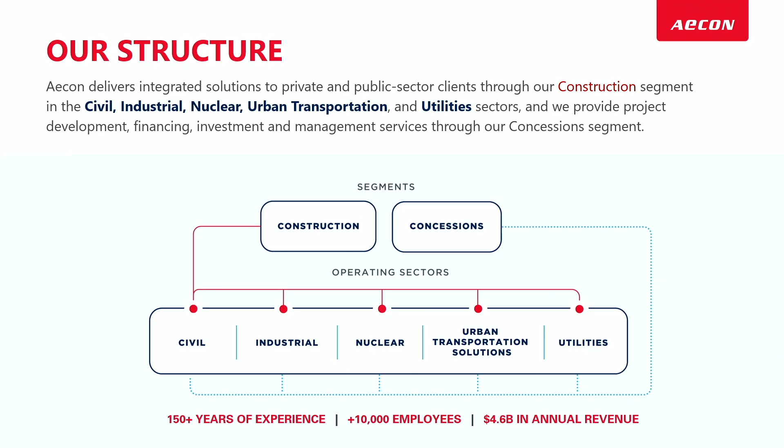Aecon Utility Engineering falls under the Aecon Utilities umbrella.

And to speak a bit about what my division does, we're the dry utility experts at Aecon. 20 years experience in engineering, $27 million worth of revenue for this year, over 200 employees.

And we have $15 million in backlog. Our well-established industry relationships help us coordinate the interests of pipeline, transit, telecommunications, electrical, green energy.

Once again, we are a team of dry utility experts.

When we talk a bit about why our customers choose Aecon Utility Engineering, there are 3 pillars that set us apart: quality, constructability, and we provide cost-effective solutions.

So quality meaning our safety is at the heart of every operation and every design that we do. And our processes ensure that any design or operational changes never compromise our integrity.

For constructability, the biggest advantage we have is that our engineering and construction teams work hand in hand together. We're integrated teams. We work out of each other's offices and yards.

And our processes basically help us deliver jobs that have less field surprises, smoother execution, and faster deliveries.

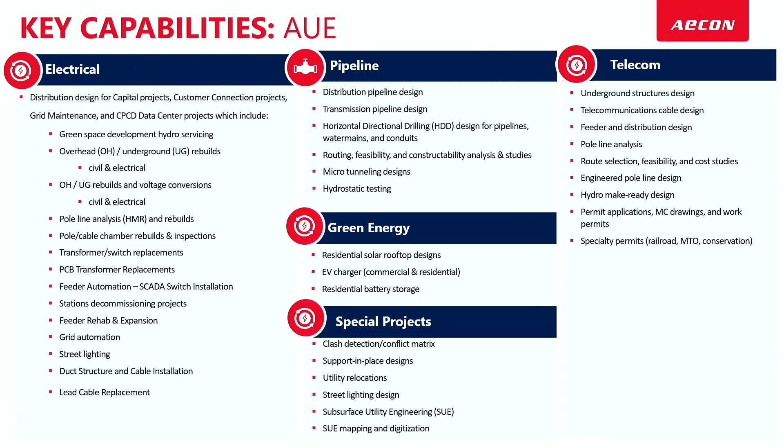So we have electrical, our electrical design for capital projects, customer projects, grid maintenance, CPCD data center projects, which include green space development, as well as overhead and underground rebuilds for civil and electrical services.

We do voltage conversions, pole line analysis, hydro make-readies, chamber rebuilds and inspections, transformer replacements, and so on.

For our pipeline group, we engineer distribution pipeline designs, transmission pipeline designs, horizontal directional drilling for pipelines, conduits, and water mains. We do many studies like routing studies, feasibility studies, constructability analysis studies, and microtunneling designs.

For our green energy renewable group, we do solar panel rooftop solar panels for residential homes, as well as battery storage for residential homes. We do EV charging stations for commercial and residential.

Special projects is mainly our subway extension jobs or LRT jobs, where we do clash detection and conflict matrices, basically looking at what the owner's engineer has produced for plans, finding out the best way to move existing utilities, whether it's gas, hydro, or telecommunications, out of the way so that we can build the subway station. We do support-in-place designs for them, and once construction is complete for the subway or LRT, we do reinstatement designs, which means putting everything back in place.

For telecom, we do underground structures designs, telecommunications cables designs, feeder and distribution design, pole line analysis, and route selection and feasibility studies.

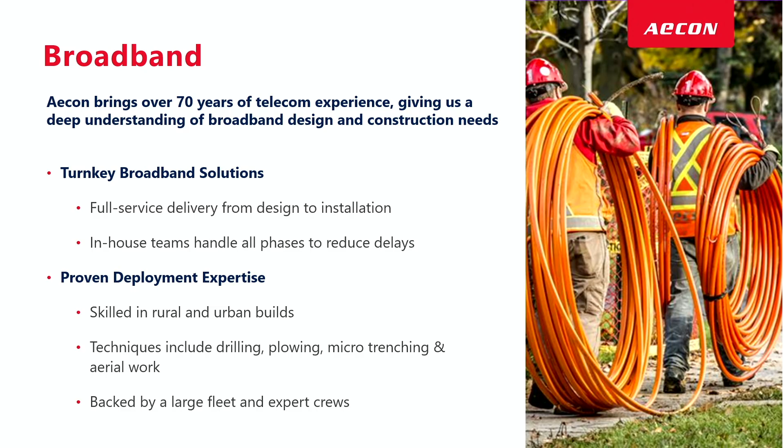We have full service delivery from design to installation. We have an in-house team that handles every single phase of the project to reduce delays. We have proven expertise in deployment. We're skilled in rural and urban builds. Our techniques include drilling, plowing, microtrenching, and aerial work. And we're backed by a large fleet of expert crews.

We have Idaho County, where we're in phase 1. We won phase 1 on 3 RFPs connecting the cities of Orofino, Nez Perce, and Grangeville, Idaho, and we begin construction on that, which is 30 miles of conduit fiber with 2 telecom shelters and generator stations on September 22nd.

Next, we have Metronet fiber. This job is in Albuquerque, New Mexico, where we started this project in 2025, and it's expected to go until 2027. $60 million scope, where we're doing construction for the last mile urban. Work packages range from 20,000 feet to 40,000 feet, including placement of small and large vaults, residential and commercial installation of HDPE conduits along pre-designed routes. It's a directional drill job.

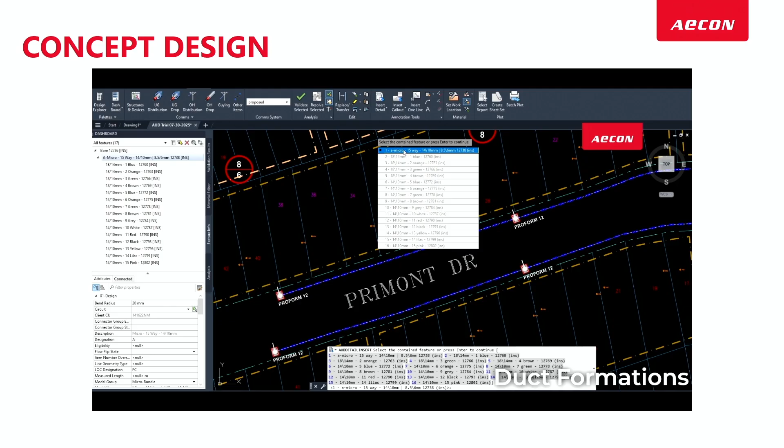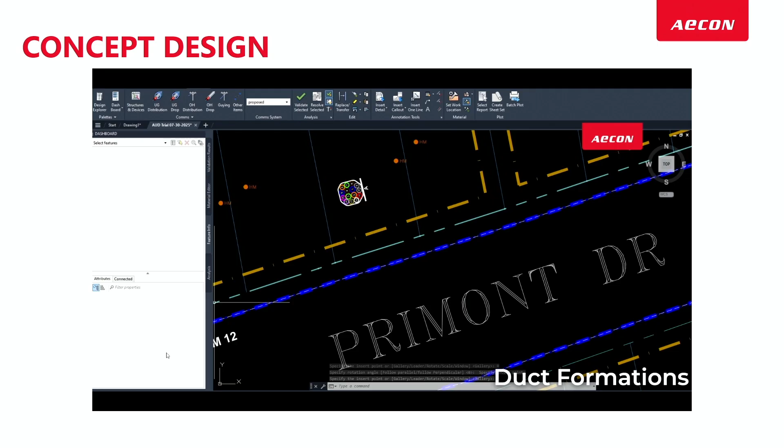AUD supports complex duct formations, including multi-cell microducts. Designers can configure duct banks with predefined templates, ensuring consistent layering and spacing. The software checks for constructability and alignment, making duct design faster, more accurate, and scalable across projects.

Cable routing in AUD is intelligent and rules-driven. Designers can place fiber or coaxial cables with automated slack loops, terminal assignments, and splice counts. The system tracks cable paths across ducts and conduits, ensuring logical connectivity and reducing manual errors.

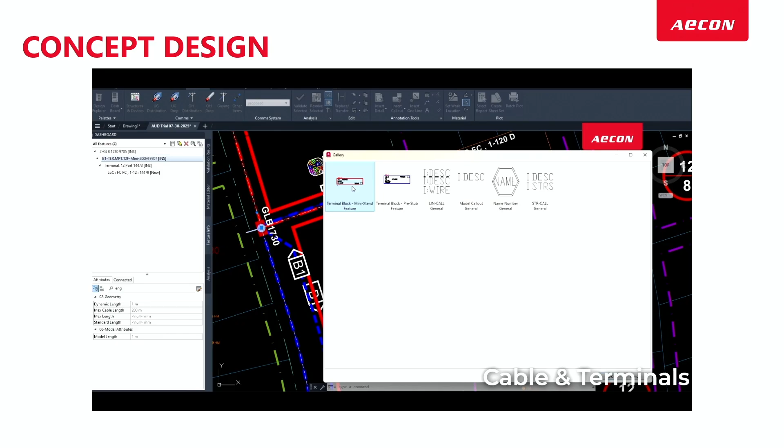Terminals are placed using telecom-specific templates that align with OSP standards. AUD ensures each terminal is correctly connected, labeled, and validated for capacity. Real-time checks confirm splice limits and terminal distances, improving field readiness and documentation accuracy.

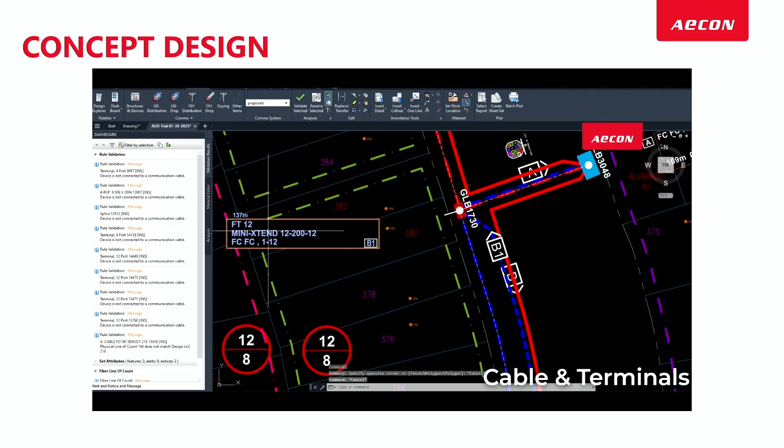AUD's live quality control engine runs continuously during design. It flags clearance violations, duplicate assignments, and missing connections instantly. This proactive validation reduces post-design QA/QC, accelerates timelines, and boosts confidence in every deliverable.

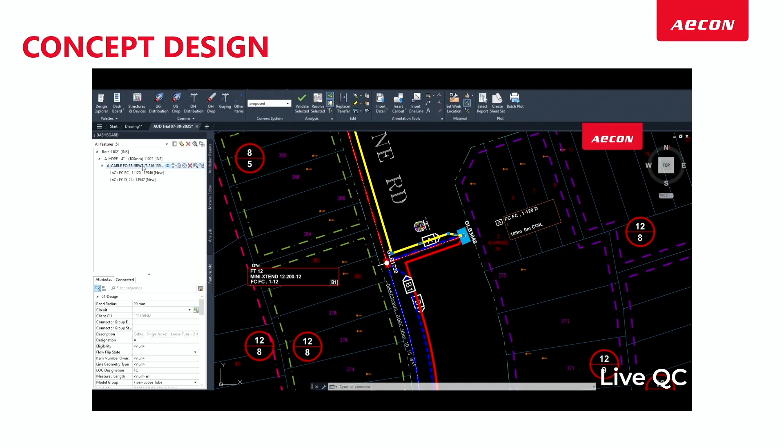I have one more demo video.

ABD allows designers to place telecom equipment with precision using intelligent objects. Each item, whether a cabinet, pedestal, or splice enclosure, is inserted with embedded metadata and rules. This ensures accurate placement, automatic labeling, and seamless integration into the overall design.

With ABD, conduit placement is streamlined. Designers can lay out conduit paths that the system validates for each route in real time, reducing rework and ensuring compliance with ISP standards. In addition, this allows for accurate duct formations for connectivity purposes.

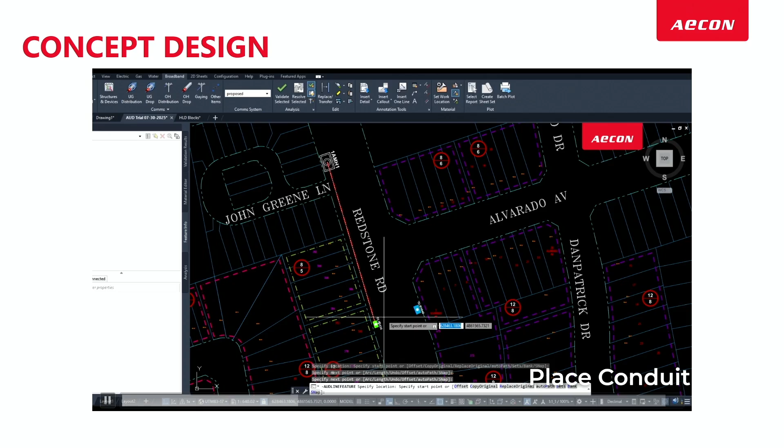AUD supports complex duct formations, including... sorry, that was the same one. I'm going to play the next one.

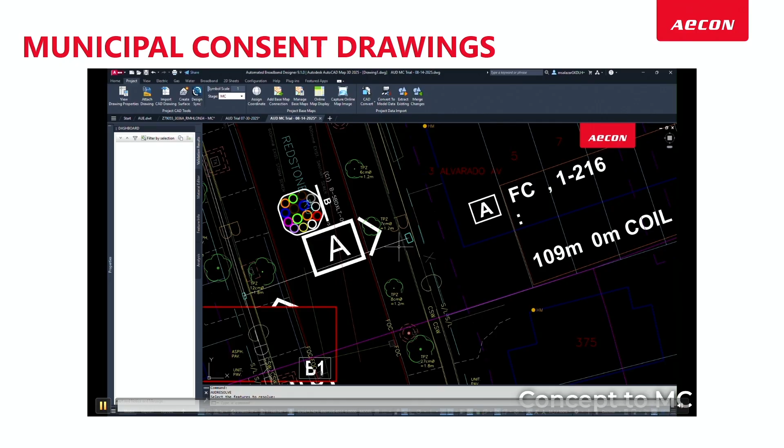ABD enables seamless transitions between design stages. With a single click, concept designs evolve into municipal consent mode, activating detailed validations like clearance zones. This reduces manual rework and ensures every stage builds on a validated foundation.

Line connectivity is visualized in real time within ABD. Designers can trace fiber paths across terminals, splice points, and conduit segments. This ensures logical routing, accurate documentation, and immediate detection of breaks or misalignments in the network.

ABD allows designers to switch construction types like aerial, underground, microduct, directional drill, or open trench on the fly. Each change updates associated rules, clearances, and materials automatically. This flexibility also supports diverse deployment scenarios.

Beyond basic adjustments, ABD empowers designers to manipulate running lines with precision. You can introduce curves, elevation changes, or offsets to reflect real-world conditions. As you reshape the path, ABD's live validation engine checks for clearance violations, depth requirements, and connectivity integrity.

ABD supports embedded construction notes and Arbs directly within the design. Field instructions, permit references, and build annotations are linked to specific assets, improving clarity for crews and streamlining as-built documentation.

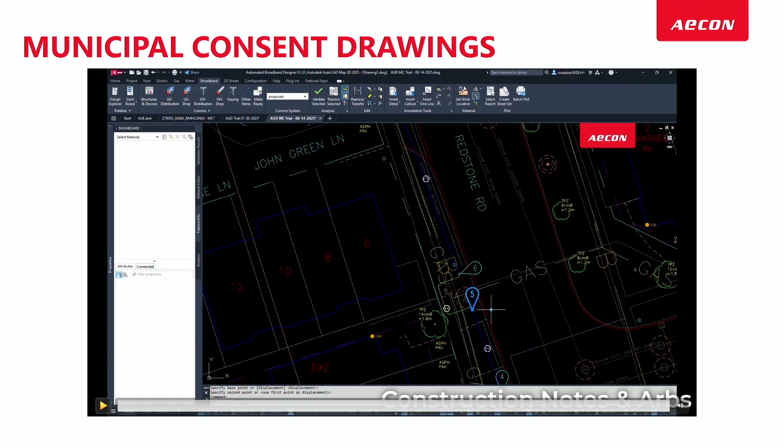Okay, that was the final demo video. ABD. Okay, thank you. We're not replaying that again.

So just the last couple of slides. I just want to talk a bit about the next steps and what our Aecon advantage is.

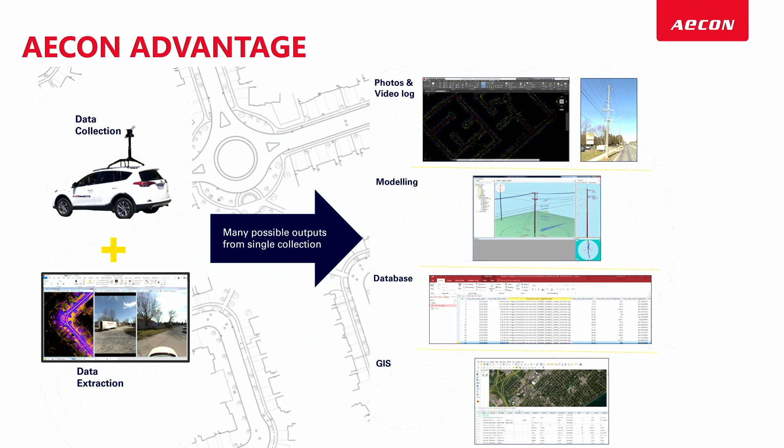Right now we do our own data collection and extraction, and we can put it in different platforms, whether we want photos or video log, or model it in our O-Calc software, SPIDAcalc, or PLS-CADD. We can also convert it to a database or a GIS system, which is the front-end solution all packaged together.

Future state, what we're thinking is all of this can be imported in, converted in with a click of a button. So that means you have your existing infrastructure, and then you'll have your existing new designs that you can build towards. And it'll be a rule-based design, so we'll utilize automated rules to design around the existing infrastructure that we just imported in.

Again, we can export plans and permits. This can help us with exporting plans and permits for construction crews.

Also, another future state we're thinking about is how do we incorporate this into as-builts? Can we put this all into one platform? Can we provide our construction crews with a tablet with an intelligent AutoCAD ABD model installed in it, where they can just draw intelligent lines?

That way, when it's synced, all of it gets uploaded and put into our original as an as-built, and there's no human intervention, as in no one needs to go in and validate or check. It's all checked through rule-based checks, and your as-builts are already complete.

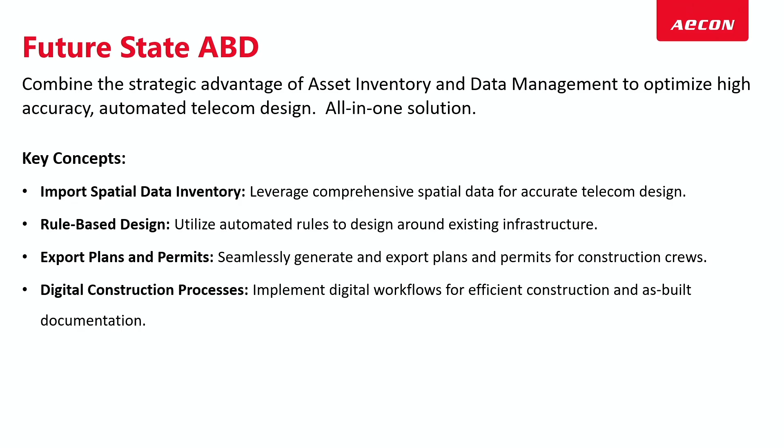Another thing we're looking towards is how do we export our SPIDAcalc and software pole line analysis into our ABD, where we can just export and start continuing to draw as we do pole line inspections and pole line analysis or rebuilds or anything like that.

So there's lots to look forward to, as well as AI, maybe. There's a possibility in the future is maybe there can be an AI embedded ABD system where it'll tell you what suggestions there are to do future designs.

If you already have an existing infrastructure, you feed into the system what you're looking for, what the neighborhood needs to feed, how many homes you need to feed. Then an AI model can tell you exactly which running line to choose, because it already predicts how far you need to be from utilities, reading into the standards in the templates for how far the spacing needs to be, depending on the municipality, state, or province. All of that can be done simultaneously, and that would be the future state we're looking at.

Again, this is a partnership between SBS and Aecon, and we're hoping to innovate and collaborate even past our implementation and testing phases, and hopefully we can develop this with our electrical and pipeline platforms as well. Thank you.